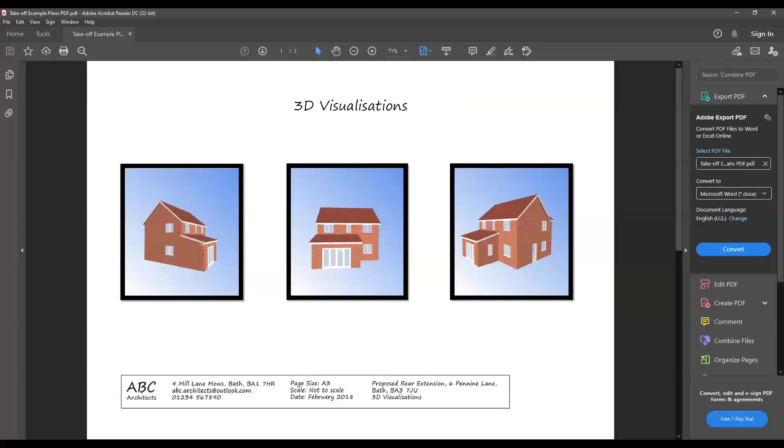We're going to be uploading this PDF, which I'm going to populate on screen. It's actually just this kind of extension off the back we're going to be doing, a little lean-to. Keep it nice and simple today. This will be our plan view.

The reason I'm using this plan is because on our website, it actually exists as part of our Take-off and Estimate Kit software skills training on our how-to video section on the support site. I'd encourage anybody looking to use this method to get their teeth into this software skills training course.

It's broken down over 4 modules. The first module is hosted on YouTube, so you can watch it as and when you need to. It also has that PDF attached, which you can download and use to practice on. It's also got shortcut keys and what they mean and how to use them.

I'm going to be using a combination of these keys and I'll try to explain them when I use them. These keys are very helpful when it comes to using the software as you go. It can be slightly unintuitive with the mouse gestures - it takes a little getting used to, but once you do, they become second nature, like anything as you learn.

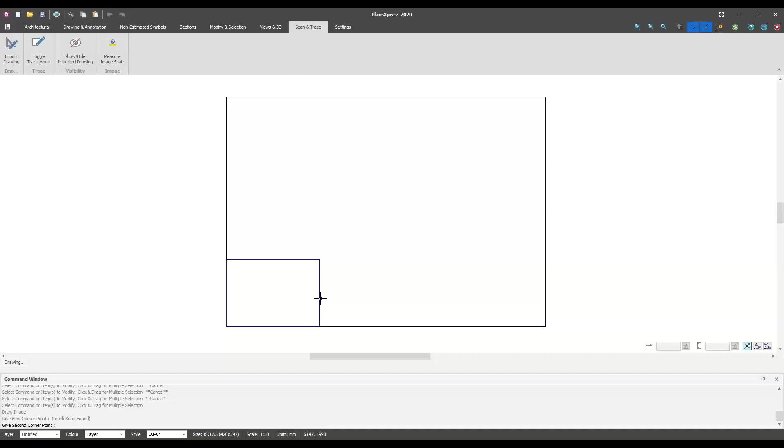When we click finish, it's simple now, just moving the mouse down to this bottom left hand corner. What the mouse will do is actually snap to that bottom left hand corner, it'll snap to that little point, it'll find the origin point. What I'm now doing is left mouse clicking, but taking my finger off the mouse and just moving the mouse up to that top right hand corner. So that's all I'm doing there, I'm just pasting it into there, but taking my hand off the button, just moving the mouse. Then I'm left mouse clicking once we get to this top right hand section, and that's pretty much the PDF in here.

Now that's actually using a template. I'm sure some of you are thinking, well, we don't always know the scale size of the plan. So what we've done is we've actually built in this measure image scale button.

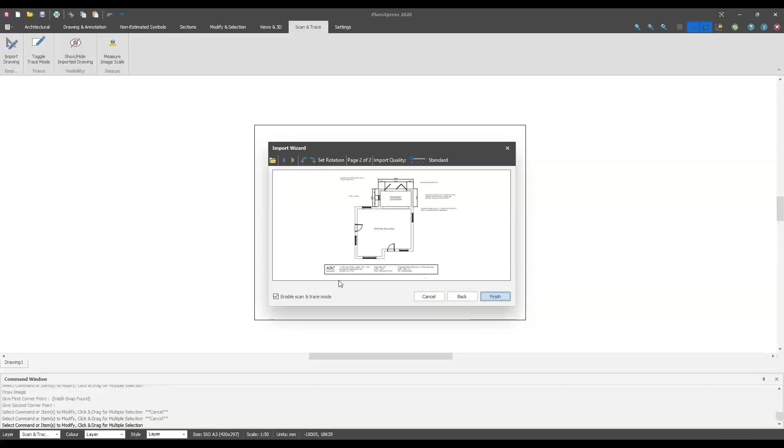Once we import the plan, what we can actually do is go find the one that I'm after, click open. So repeating what I've just done, go find the right one, plan page number 2, click finish. Now rather than pulling it all the way up there, say I don't really know what the scale is, all I have to do is paste it anywhere on here. And then using this tool here where it says measure image scale, we know the length of that wall, it's 4.8 meters in length, or even this door, this door is actually 3000 mil wide, or even if I was just measuring the cavities, say at 300 mil, we'll make a rough idea - it's probably going to be about 300 mil wide.

If I click on that measure image scale button, and then click on the PDF edge, just there, that's the line of the PDF, just there. And then what I can do is measure from that wall to that wall, and then punch in 4,800 and click OK. And what the software does is it actually rescales that for me.

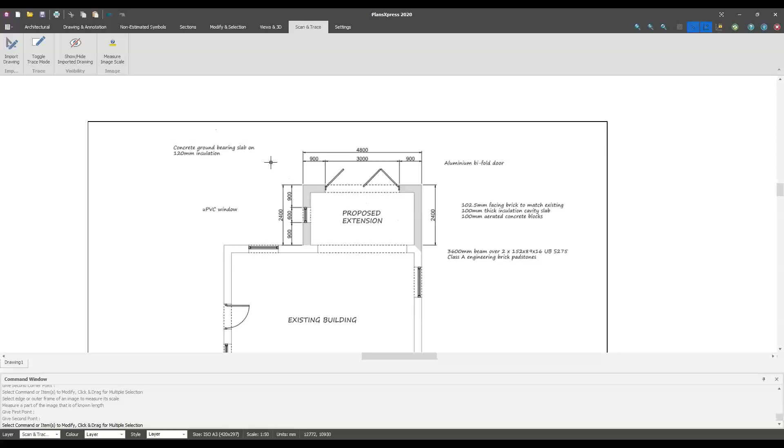So if you don't know the scale, you don't have this information on the plan, someone's just giving you a plan and it doesn't have too much information on there, as long as you know a known length, width, or height on the drawing, you can use that measure image scale button. You measure that area and it will resize and rescale the plan for you to the right size. So it's a little feature in there, quite useful. I see a lot of plans coming from our users, from our inquiries, and yeah, a lot of them do not have that much information on there.

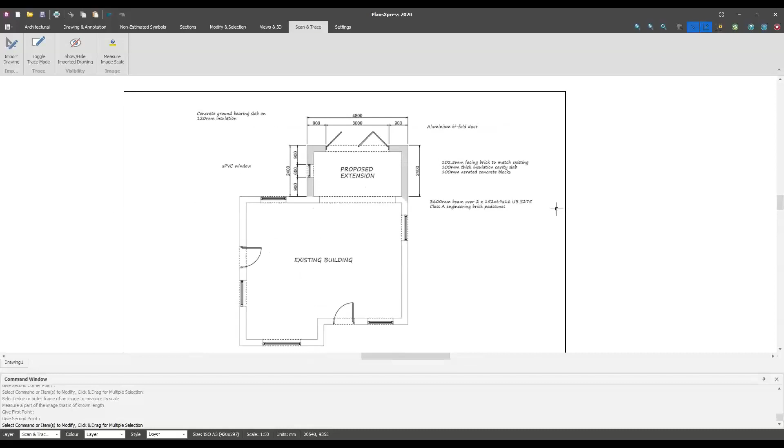So we've got a plan in. What I'm actually doing there is just rolling up, for those that have got a 3-button mouse, you'll have a little roller wheel on top. If I'm just rolling that, wherever I point my crosshairs on the mouse, if it was over here, it'll roll to that section, if I was pointing over here, it'll roll to that section. And what that's going to allow you to do is just get right into the drawing, it's a nice little navigation tool in there.

And what I'm doing there to actually manipulate and move the drawing round, I'm just pushing down on the roller wheel, and that will allow me to move the drawing around as well. For those that are maybe working PDFs, there's a grab feature in a PDF drawing or image. You can use that, or again, just rolling and grabbing. That will become second nature the more that you use the software.

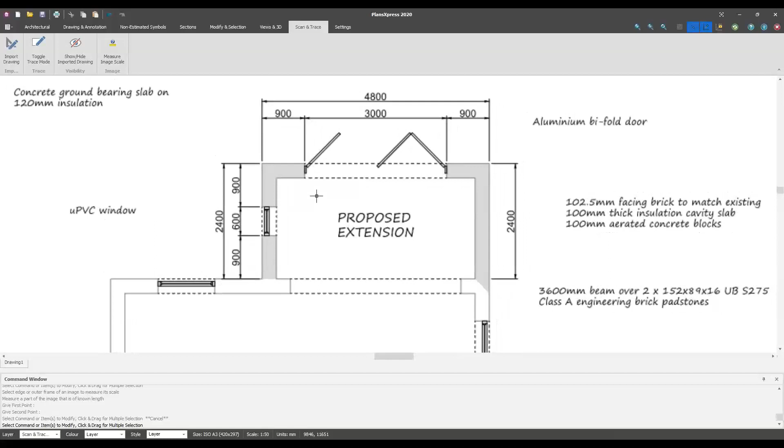Now, what I'm going to be doing here, I'm actually going to be tracing over this section, this proposed extension. We're actually going to replicate what's already here, because this being a PDF, there's just no information on here. It's just an image, but it does have some detail. So in order to actually draw this, what I'm first going to do is mark out the edge of this existing wall we're going to be building off just here. And I use what we call a construction line.

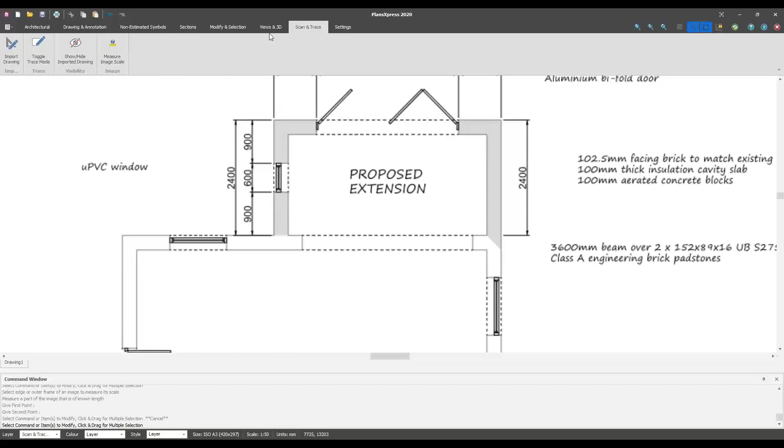Now, they can be accessed if you push down on the middle scroll wheel button. You'll get this little sub menu popping up, and you can access your construction lines there. Now, for preference, under settings, you can actually switch that mouse button around. I actually use the right click rather than the middle scroll wheel function. I just prefer the right click. That's just how I like using the mouse. So I've changed mine, so I have a right click function there instead of the middle scroll wheel function.

All right. So if I choose a construction line, I can choose a vertical one, and that is now a little floaty line that's floating around on my screen. I'm just going to line it up with the edge of that back wall. Again, the construction lines are just used as a reference point, and they will come in very, very handy. And it's all explained in the video, just how important they are.

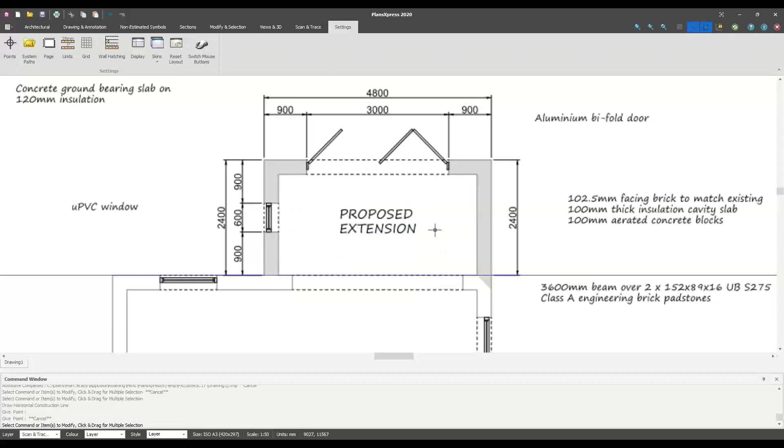Now, this first wall, I'm going to set another construction line, 2.4 or 2,400 mil from that construction line up to one there. So if I select another horizontal construction line, I'm just going to lay it on top of that one. It will snap to that construction line. And when it's on top of that one, if I press the R key on the keyboard, then using the up arrow key, I can actually punch in a distance. Because I've used the up arrow key, the direction of that construction line is going to move from south to north.

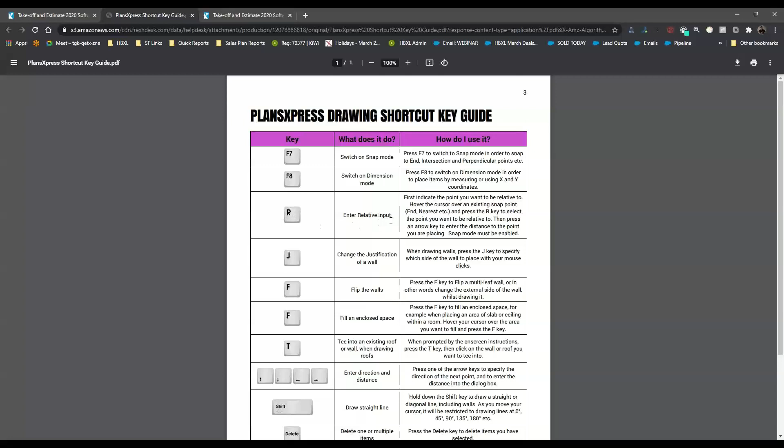So I'm going to put in 2,400, click enter on the keyboard, and that has now placed a construction line 2.4 meters from that one to that one. And as I said, this is all explained in our little hotkeys. That's the R key there. It actually stands for the relative input point. And that's your keyboard keys, up, down, left, right. That will allow you to put in a direction and also distance. So that's what I've employed using those little keys there.

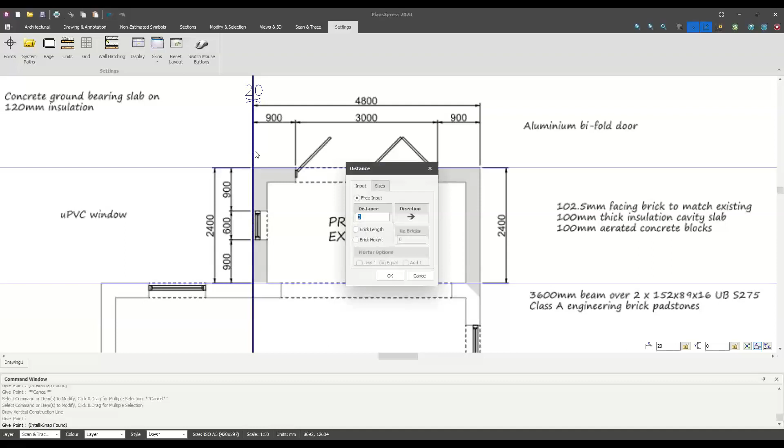Again, I'm going to use another construction line. This time it's going to be a vertical one. I'm just going to mark out the edge of that wall there. But I want to set another one, 4,800 mil from there. So again, I'm going to repeat what I did before. I'm going to lay that construction line on top of there. It will snap to that. I press the R key, but this time pressing the right arrow key on the keyboard, punching in 4,800 and clicking enter. That's now set a construction line 4.8 meters from there to there.

So when I now place my walls, they're going to be placed around the right dimensions based on this extension. And I'm ready to place my walls now on the extension here. Just while we do that, I'm going to bring up the 3D preview. Now, the 3D preview sits on the right hand side.

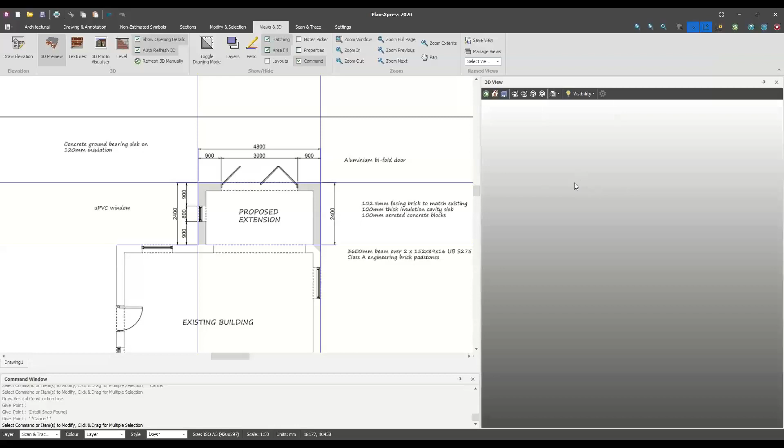You can have different kinds of color backgrounds if you want to. If you want to work with the white background, go for it. I like working with a black background or a grey background. It's again just down to preference really, or a dark grey one. The reason I want to leave it open, I want you guys to see it will create a 3D image of the walls once we place them.

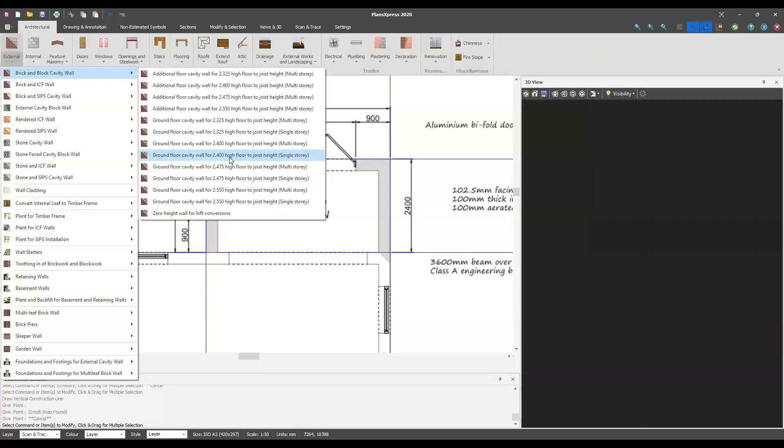I can change it anyway once I select it, but these again are just here so you can quickly choose the right height of the wall or something that was quite close to it. So what we're going to do is a ground floor cavity wall, 2.4 meters high, single story extension. So I'm going to select that template there. It just takes a couple of seconds to load.

For those that are familiar with Estimator Express, you'll find these little windows, these little boxes in Estimator Express. So this is now going to be the values that I'm going to be estimating the plan with. When we pass it into Estimator Express, it's going to pick up these dimensions and then estimate it based on these values. So we've got 2.4 meters high. As I said, you can change that. If you want it to be 2.5, 2.475 or 2.4, you can put whatever height of the wall you want in there.

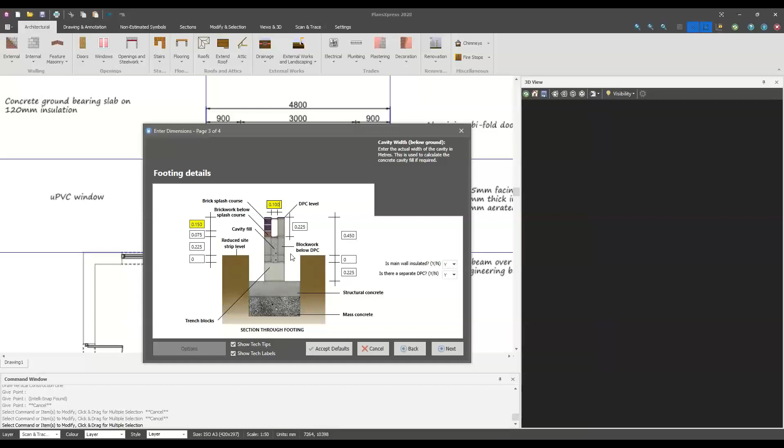All right. Leaf thicknesses are going to be 100 mil. The width of the trench is going to be 600 mil. The depth of the trench is going to be 900 mil. So again, all these values will be passed over into Estimator Express to be estimated on. The footing details, we can do whatever cavity widths you want to put in there. If you want to increase them to 140 mil, you can do. If you want to leave them at 100 mil, go for it. But any of these other values we can change.

And also when it does the estimating, it will also estimate the internal block wall. It will plaster it. It will also decorate it. It will also run a skirting board around the internal leaf, as well as prime and decorate that skirting board as well. All right, so that's everything that's going to be estimated when it goes into Estimator Express.

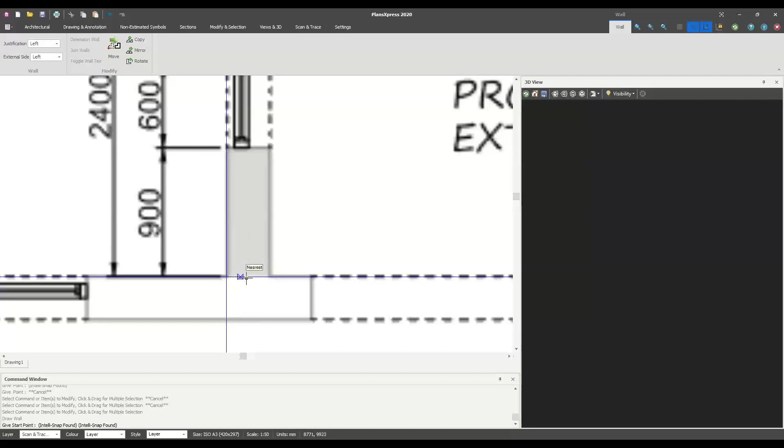When we click Finish, what I now do, I zoom in using the middle scroll wheel button, stick in my crosshairs. I can manipulate that around if I want to really get into the corner of that drawing. What you'll see there, it's actually snapping to the intersection point where these two construction lines meet. And that's why I laid the construction lines down, because it will snap to there. So all I have to do is left mouse click.

I can just stretch it to that point there. I can then stretch it across here, and then I can just pull it down to that wall there. And as you can see in there, that's our 3D now generated with the three walls that we've just placed on the plan. Quite easy, quite straightforward, once you get the hang of it. And as I said, all of this is done in the modules. I think Olivia actually goes as far as creating the existing building as well.

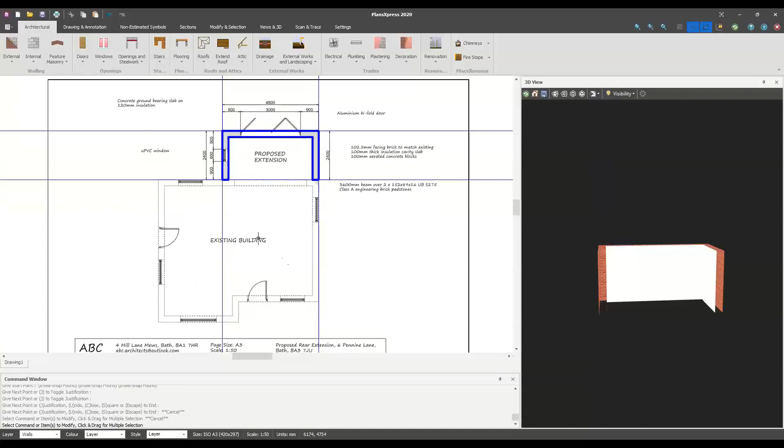So what she probably does on the video, you can actually then kind of create the existing part of the build. We're not going to do that today, but what I am going to do, I'm going to put in this back wall, because we've actually got an opening that we're going to form into this existing wall we're building off. So to put the existing wall in, you've got two options.

You can either just click on that button there and it will choose the wall, or if I right click, I can choose the last thing I did, my previous command. So if I choose that, it will copy whatever walls you've just placed there. And what I'm going to do here now, I'm going to place the wall from there, and I'm going to just attach it to that wall there. Okay, so that's the existing wall that we've just popped on there.

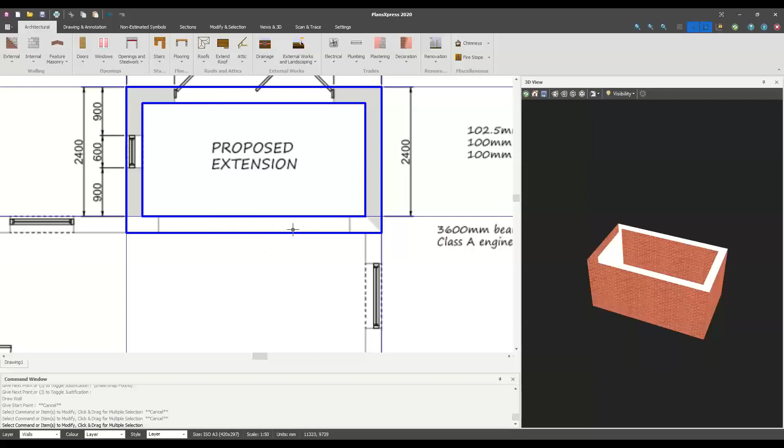Obviously the brick facing on that side is an existing wall we're building off. Now we don't want to price up this section because it's already there. It's all part of this long wall here. So what I'm going to do, I'm going to select it. Now I know it's selected, and the 3D does help me to say that it is selected. It goes that purple color in the background, so we know that we've selected it. Now if I right click on my menu, I now get these additional options in here.

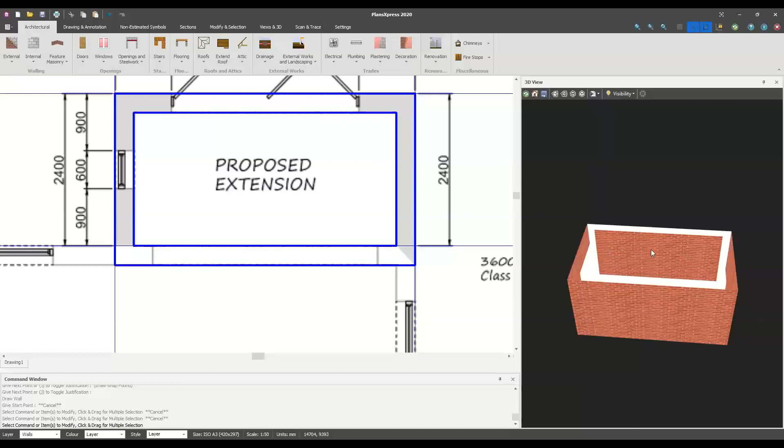I can set the wall to be non-estimated. So if I click on that, it will second guess me just to make sure I'm doing that correctly. So if I click yes, this back wall is now non-estimated. So if I fed this into EstimatorXpress now, it will ignore that wall. It's not going to price it up. It will only price up these three walls here. Because what I want to do, I want to form an opening into the existing wall, which will be estimated.

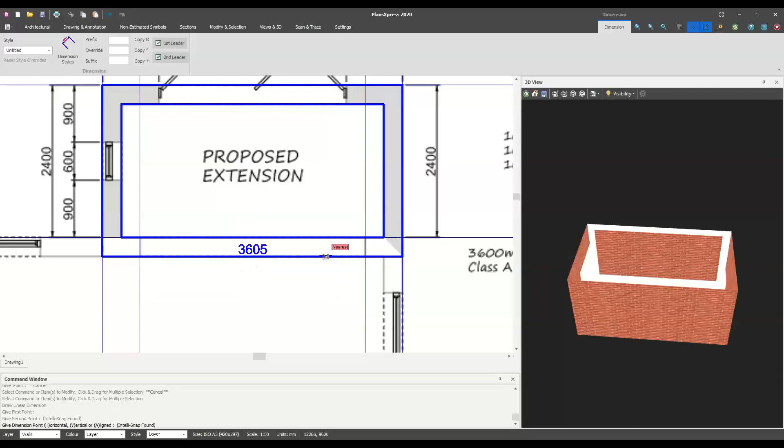So to form the opening, we don't really know the size of the opening. Now you can use, sometimes I show this, a construction line if you like. You can set a construction line from there to there. And then what you can also do in this right click menu is under the annotation, you can click on the linear dimension tool. And what I can then do is just click on that construction line, move it to that construction line, and that will tell me that that gap is about 3.6 or 3.605 meters wide.

Now, give or take a few mil, it's probably about 3.6. So I'm going to put the opening in there at 3.6 meters wide. So I'm going to go to the structural opening. I'm going to do a large opening size, and that's already got one in there at 3.6 meters. But if it was 4.2 or 4.1 or 2.5 or whatever the opening sizes are, just change the value in that section, and then that would draw the opening at the correct size. And we're also going to take away 2.1 meters high.

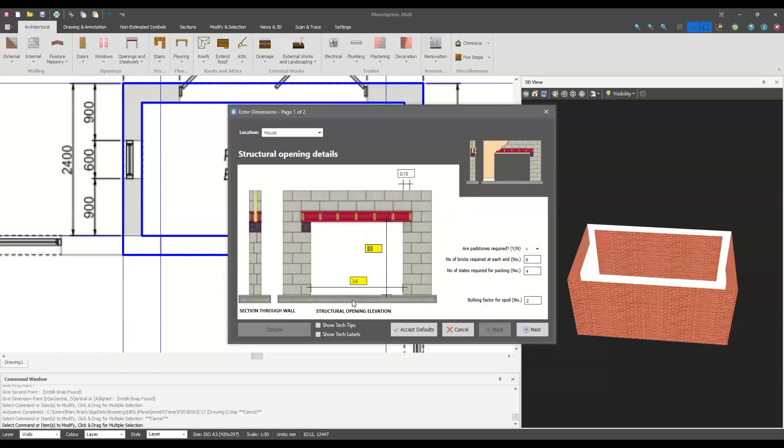When it goes into EstimatorXpress, it will also allow for the lintel, the steel that's going to go above it. So it's going to take away all the brick and block work from that section. And it's going to plaster around the opening as well for me. So that's the opening there now. So again, I'm just going to line it up, just pop it in there. And then you'll see in the 3D, it shows the opening.

With the 3D as well, you can spin this around. So if you want to get a different view on it, you can. You can manipulate that just with the mouse. Keep your finger down on the left mouse click. All right. What I'm also going to do is just highlight these two construction lines.

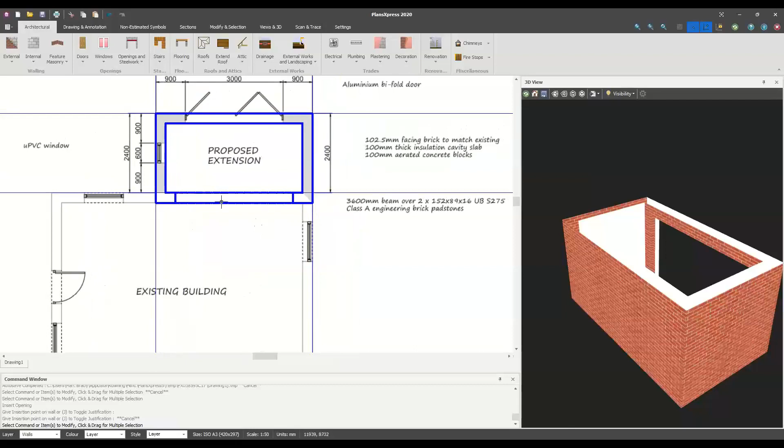You can do that by using a method called lassoing. So what I'm doing, I'm lassoing just there to select both of them, and then press delete on the keyboard and they'll disappear. All right. If you want to lasso the whole drawing, you can, but it's just something we call lassoing. All right.

What we've got in here now is we're going to put a floor down here. There's no floor at the moment, so I'm actually going to drop in a slab around this section, but I also want to put the slab into the opening section as well. So when I go to the flooring section, I'm going to go to the floor slab. It doesn't necessarily have to be a slab. You could be putting down a raft, a beam and block, or a timber floor. But we're going to be doing a slab.

I'm going to do it in an irregular shape because I want to get this little shape in here. What that allows me to do is when we select the slab, we can then estimate the slab up, all the values in there. We can put the depth, top and bottom reinforcement if there's any.

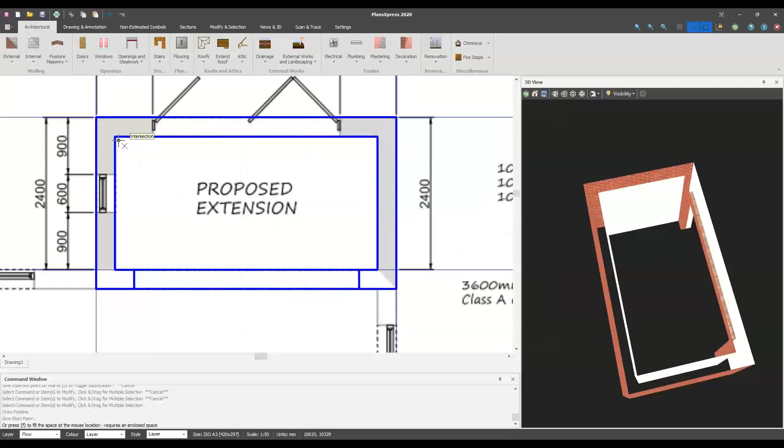And then what I can do is just go to the corner. Just make sure I'm in that corner, and that's where the middle scroll wheel button comes in handy. You can really get into those sections, scroll out, scroll into that one, scroll into that one. All I'm doing is following the contours of the area I want to slab. So I'm taking in this little opening section, and then we finish off in that little circle where we started. And that's us put the slab down. You can see there it's got that green section with the little opening covered as well.

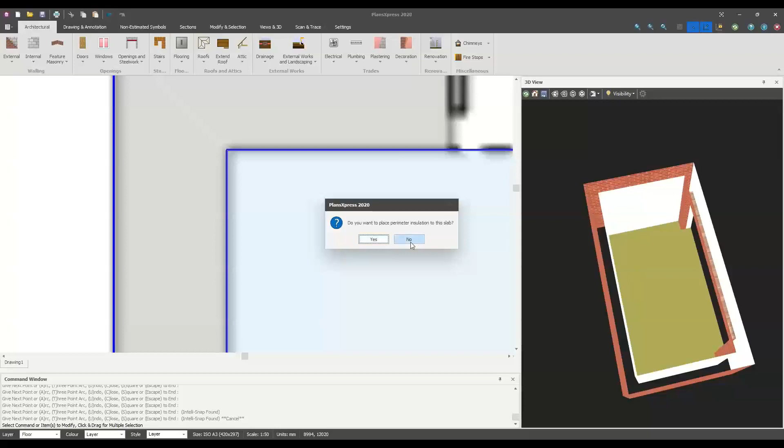Now it's asking me, do I want to place perimeter insulation? I'm not going to do it now, but if I clicked yes, I would do exactly the same thing I've just done by going around the edge, and that will then put perimeter insulation around the edge for me. All right.

Oh, yeah, one question. Your snap point, if it has been turned off, there's two ways of doing it. Where is it? Where is it? If I'm just placing, probably the best thing to do is press the F7 key on your keyboard if you are following what I'm doing. So for your snap, you press the F7 key, that should bring your snap function back on. All right. So I'll just answer that question. Let me know if that works.

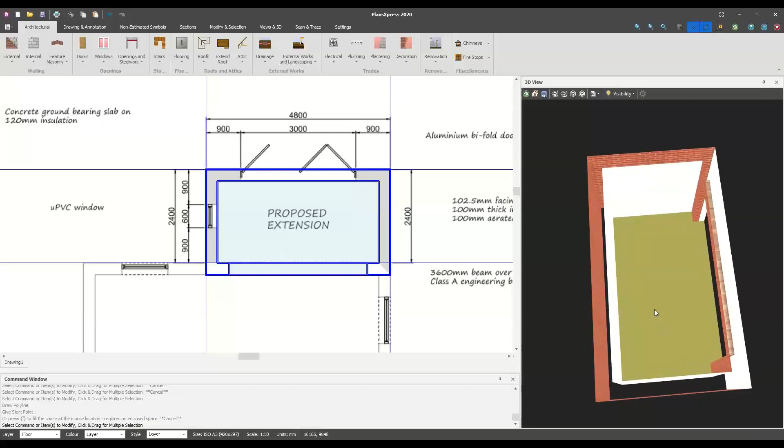So yeah, now we've got the slab down, and then we can start putting in some of the details here. Obviously, we've got a window this side, we've got a bifold that side. So let's put the bifold door in first. We know it's 3000mm across. So again, going to the door section. Drop that down, go to the doors.

You've got a choice of going through Crystal Direct. If anybody doesn't know, our software does actually link in with a windows and doors company called Crystal Direct. They are quite handy. They do actually offer a price within the software. So if I do Crystal Direct there, what I can do is go to location, go to a previous location. Let me just pop that in.

So Crystal Direct, they're a windows and doors manufacturer, windows, doors, roofing systems. If you were punching in your postcodes, you could actually see who they're supplying in that area. Just to give you an idea, they nationally supply B&Q for the windows and doors as well as TradePoint. But within that area, they're supplying Blanchford's, Build Base, XL Plumbing Supplies, Lawson's, Jubilee Building Supplies, Buttles, Grant and Stone. So they do supply a lot of windows and doors to the industry.

So if you want to put the Crystal window in there, you can go to the door section. Under the bifold doors, you can choose either a Crystal aluminium or plastic. If you don't want to use them, that's fine. Just use some of the default ones that we've got, and you can then put in, when it goes into Estimator Express, your own supplier cost. But I'm going to do a Crystal one just to show you.

I'm going to go to an aluminium door, and this brings up this little view. I can choose the size. So let's say it's 2990. We can choose the U value, 1.1 or 1.5. We can choose the color, and we can also choose how it's going to hinge. So that price there is how much you'll actually get the door for by going through Crystal Direct, through the software, rather than going through those suppliers.

So I'm just having a cup of tea a minute. Mute you so you don't hear me slopping.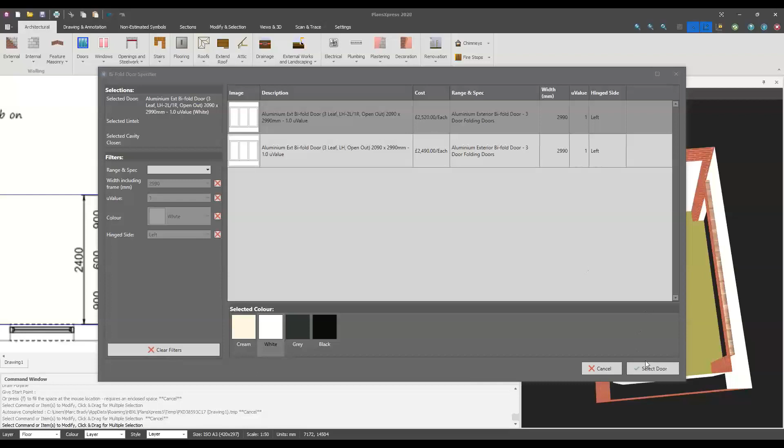So we've got £2,500 there. We can also pick the lintel, pick the cavity closer. Then all I then do is just line up that door there. So we'll pop it in there, and that's the door now gone into the extension. All right. And then what we can also do is put a window in there.

600. I think, does she have the? Can't remember. She's got it. It's got the aluminium bifolds. Yeah, she hasn't really got the height of the window, but you could. Yeah, it's just a plastic window.

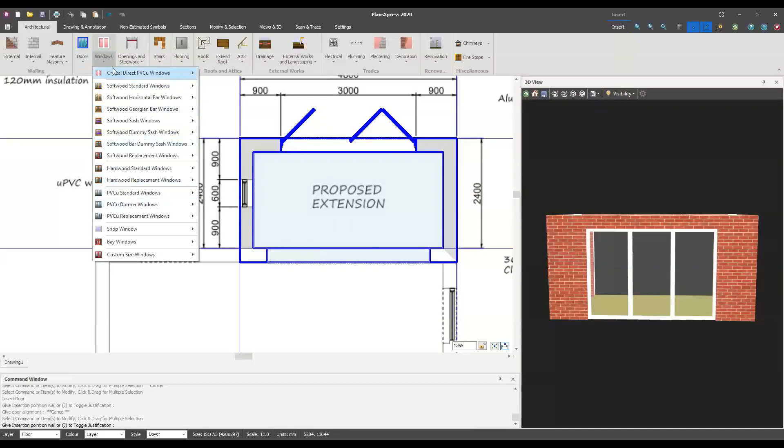Let's go to the window section. Again, I can go to Crystal. I can pick the width, and then we can also pick the height. Or rather than picking the height straight away, we can pick the style first. So if they are going to be center bars, that will then give me an idea of height. Or if it's not the bar windows you're after, a different style, style 11, that'll give you a 1038 in the height, 1.1 with a white one.

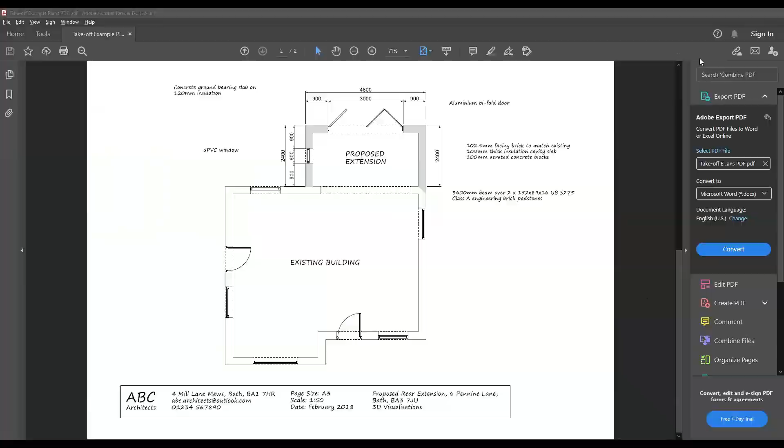So that's £150 for that window. And then just accept defaults, and then just pop that one in there. Oh, and then we should have that window on that side just there. All right, cool. Now we've got this wall here.

Now there's nothing on that wall, but that's not to say that you can't place anything there, especially if the client turns around and has a different idea, or they might want another bifold in there, or they might want a side door or another window. So what you can do is you can actually add to the drawing stuff that's not actually there.

So let's say we want to go to a patio. We'll keep with Crystal. I'm going to pop a patio in there. We'll do it at 1.6 across. Again, we'll do it as a white one, 595. Select lintel, cavity closer. Now, what we can then do is we want to put a patio door in it, and we want to find the exact midpoint.

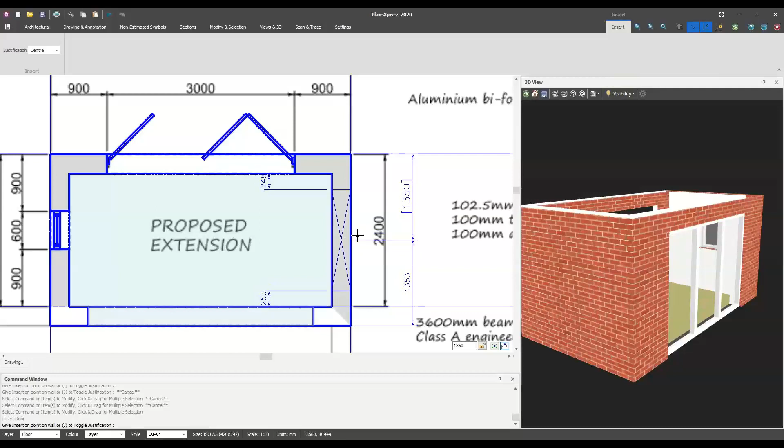If I press the M key on the keyboard, that snaps it to the midpoint, and we tell the software how it's going to open. And then we've got a little patio on the side as well now. So we've actually manipulated the original PDF with an opening that wasn't there. Again, if the client's after an additional opening there, then we can actually place it.

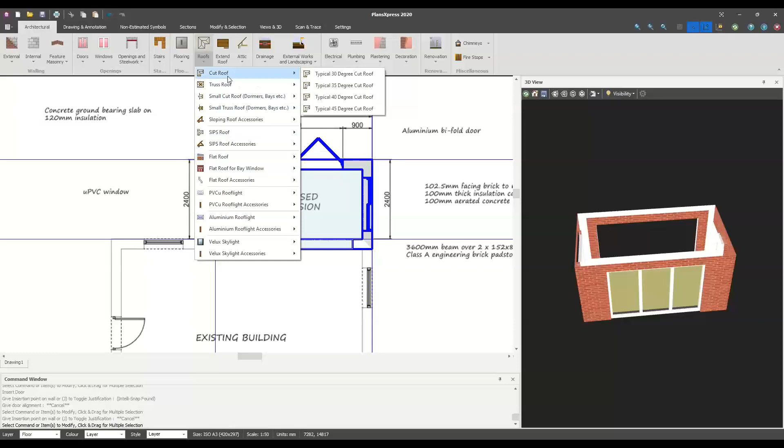And then what I'm also going to do here is just pop in a roof. Quite simply, we go to the roof section. You can place whatever type of roof, if it's cut or a truss roof, or even a flat roof. I think the original plan there was a lean-to, so we'll do a lean-to. And when you choose the lean-to, you can change the pitch. Let's do a 20-degree pitch, and this will estimate up all the timbers.

So we've got our soffits, joist centers, rafter centers. This is estimating up all the timbers, all the tiling that's going in there as well. Also all the guttering that's going to go into the roof. So everything's allowed for, all the roof finishes. So you can then choose the type of roof you want to put on there.

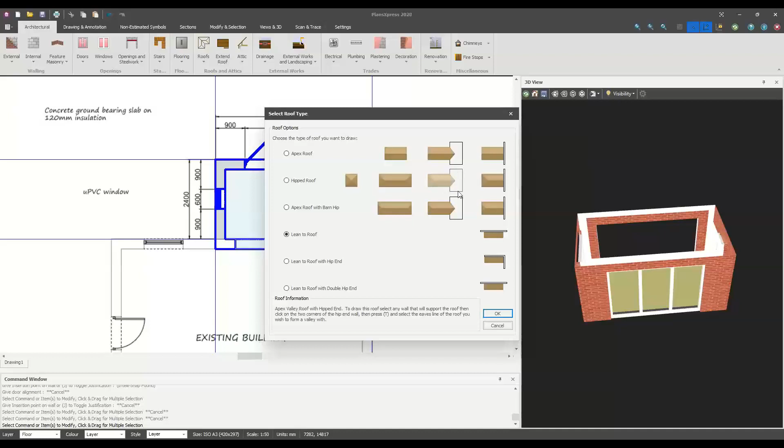If it's like a lean-to with a double hip, you can choose that one. Or if you're doing one with a hip end, we've got a corner that's coming off. Or if you've just got a lean-to that's going to go across. Or if you're doing a bigger project where you've got an apex roof. And this will also allow you to put roofs that are teed into other roof sections as well. But we're going to be doing the lean-to roof on here. So I'll click OK. So to place the roof, all we have to do is indicate a wall line that the roof's going to be on.

So I'm picking this front wall here, and then what I'm going to do is give the first corner where the roof's going to be. So I'll give that corner there. Now you'll notice that line floating around, I just need to give the length of the gable, which is going to be this side, and then we're going to give the length of the eaves to that corner. And then that drops the roof on automatically for you.

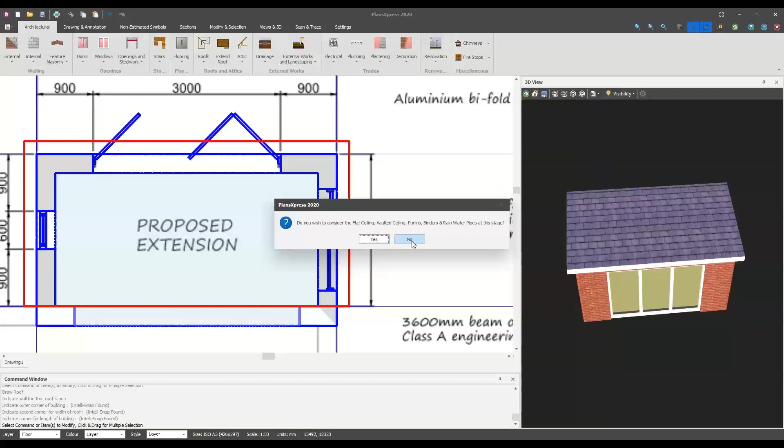If you do want to put in a vaulted ceiling or anything else in there, just click yes. And again, it takes you through how to put a vaulted ceiling into that section.

I think you can put one in just after anyway, the vaulted ceiling with a cut roof. So all we then have to do is estimate that up. That's what I'm going to do as part of this, I'm going to take that roof back off.

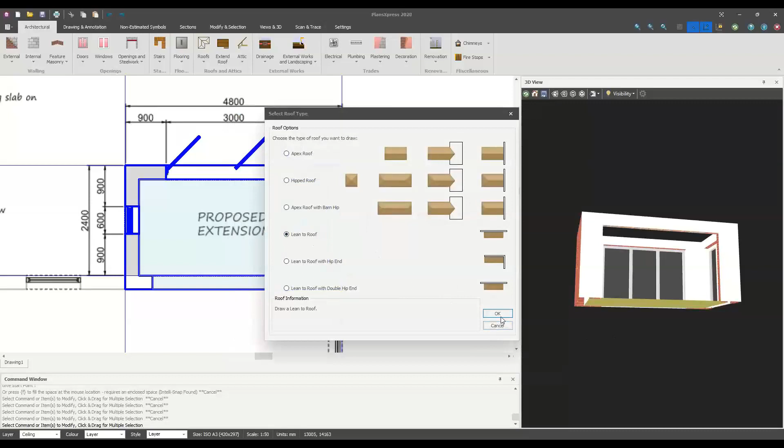Let me just do that again, to show everybody how we put the roof on. So again, change the pitch, price it up, choose the roof that you're after, select that front wall, select the first corner. The first length you give is the eaves, the gable, and then the second length is going to be the eaves there. Do you want to consider a flat ceiling, vaulted ceiling?

Yes, I do. Do you want to place a flat ceiling? No, I don't. Do you want to place a vaulted ceiling? Yes, I do. So that will allow me to finish on the vault. Select an eaves line, so we'll select this front eaves line there, and then give a start point, and then all we have to do is just go around the inside of the actual wall, finish off there.

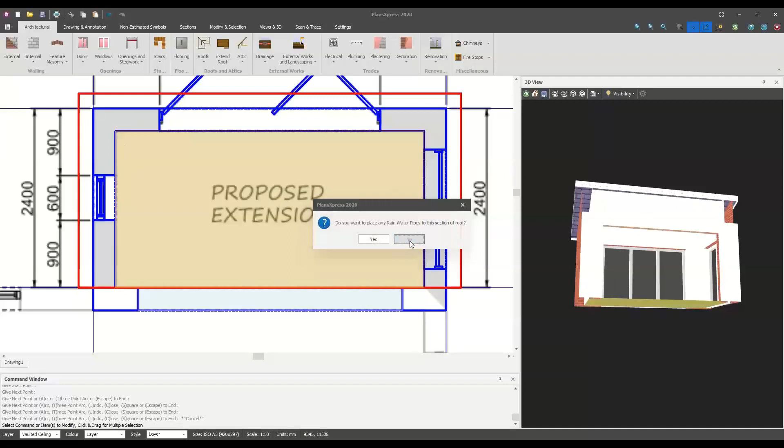Click no on that, I'm just going to click no on these other sections, I'm not going to bother placing those. But you can see now we've actually got the vaulted ceiling in there. Yeah, so it's now covering the tiles that we were just seeing a second ago. All right, so that's now going to be the vaulted ceiling, that section now.

Excellent. So yeah, this all really helps being able to visually see what the job's going to look like. Also gives the client an idea of what the job's going to look like. I mean, with our software, it's not necessarily that you have to just trace over stuff, you can create your own plans from scratch as well using PlansXpress.

But yeah, as you can see there, I mean, we can probably get through that with me explaining and everything, probably around about 40 minutes.

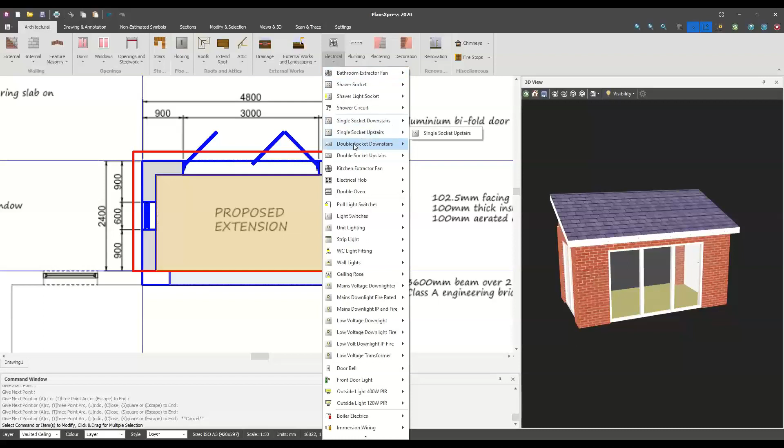What we can also do to this drawing as well is we can add any kind of electrical items. So if there are going to be sockets going in, if we want to put a double socket, we can just select that, and then we can just pop the symbol on there wherever the socket's going to go. Okay, so we've got one socket there.

Want to produce any other electrical items, we can do some outside lights, so we'll do some 400 watt lights here. Again, I can be a little bit more accurate on this, but I was finding the midpoint just there, so just snap to that.

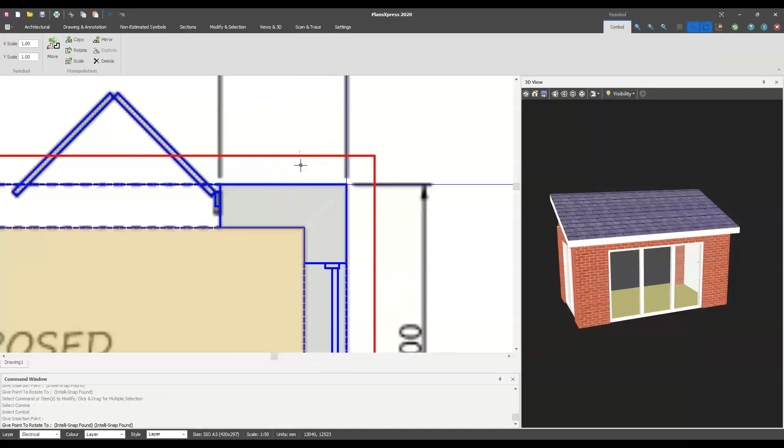Okay, so we can do the wall lights. They don't appear on the 3D, unfortunately. I think it is going to be an update that's coming at some point soon, where you'll actually have the external wall lights just there once you place them. At the moment, the only thing you can do if you want to show them in the 3D is actually use a non-estimated symbol.

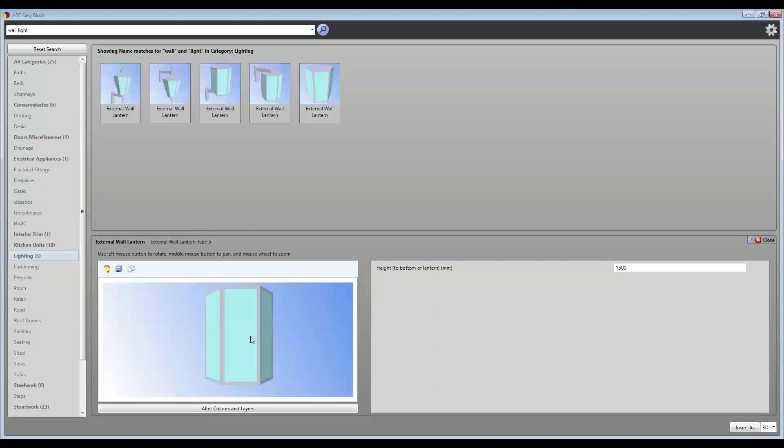And what we can do is we can actually go into the 3D architectural symbols, and I can pop in there wall lights. Hopefully that will find it. Lighting for external wall lantern. Let's select that one. You can manipulate the colors and stuff on here as well.

Well, if you want to show the effect on the plan, I think we can place it just there. Yeah, might have to make it a little bit bigger. We can select that one again, we can place one just there. So if you do want to show it on plan, you can do. You can manipulate the size of them as well. They're not very big, are they?

You can also put in some of the plumbing items as well. If you want to do a radiator, we can do a single panel radiator in there.

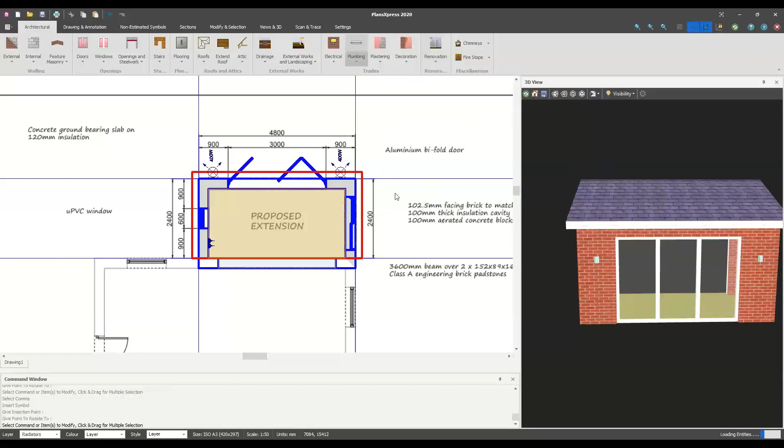And then we can choose a radiator. We can also put a radiator in there as well.

So you can then start building up the plan using the kind of electrical symbols, plumbing symbols, or if you're actually going a little bit further out here and doing a little patio for them, then maybe the patio is going up to this line here.

So I can do a little construction line. We'll put the patio to there. Again, I can be a little bit more accurate with that.

But we can go to the external works, go to the paving, and then we can lay a paving down off the back of this extension here. Go to that line, pull it to that one. So use your construction lines, and then we just finish there. And that's going to put the patio in there as well for you.

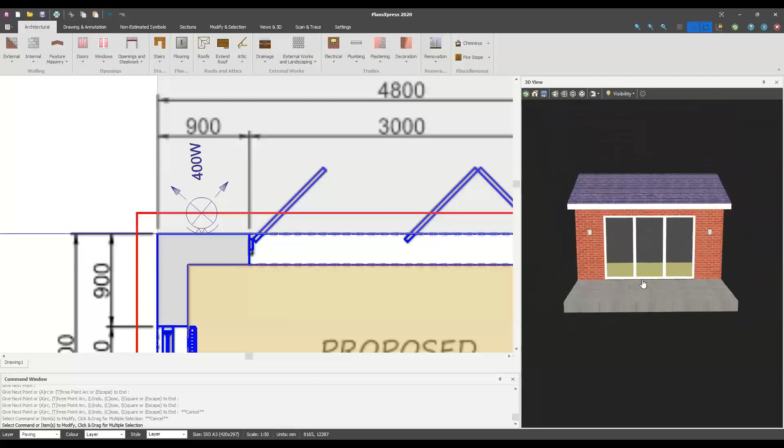Okay. So if there was a patio in the original drawing they want you to do, you can do that as well.

So let's get this section estimated. So all you have to do then is just save as, call it whatever you like, drawing 1, 2, or put the customer's details in there, just so you know who it is. I'm just going to overwrite the one that I've already got.

So let's turn our attention now to EstimatorXpress. We're going to have to pull that estimate in here. Again, for those that haven't really seen EstimatorXpress, this is our own standalone estimating package. You can just do estimates in here. You don't necessarily need PlansXpress, but certainly on jobs that you want to trace over that have a bit more to them, or you just prefer being able to visually represent the actual job from within here.

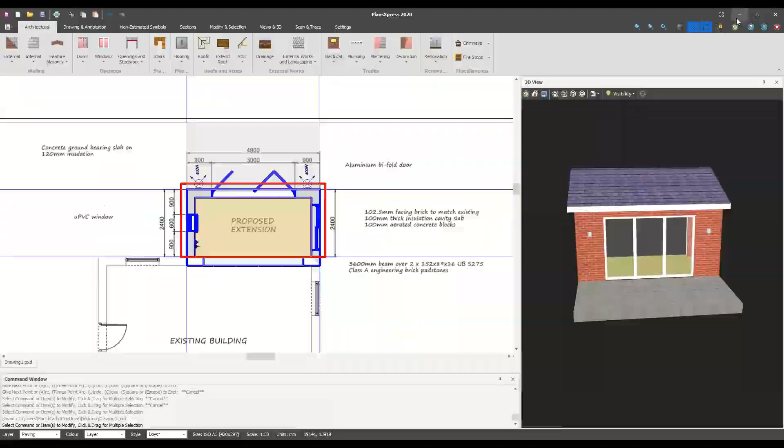So the way that EstimatorXpress works, very briefly, it bases the estimate on a price book, which breaks down into materials, labor, plant. If I just click on the material section, within here, you've actually got, out the box, these kind of prices here, which are called the HBXL Price Tracker Plus prices.

These are the default prices you'll find in the software. These are actually worked out based on a national average. We track online with different builders merchants, so we track whether or not prices are going up or down, and then we work out what the average is accordingly within the software.

But you can edit those prices if you like. I can drop in a 15% adjustment to that average if I like, and bring the prices down to whatever you want them to. So you can change these prices.

Same for the labour rates; they can all be manipulated. The brickies, for example, our software gives a guide price of around about £25 an hour. But different builders in different areas, you can again overwrite that price. If you want to increase or decrease it, you can do so just by clicking within there, or you can do it en masse.

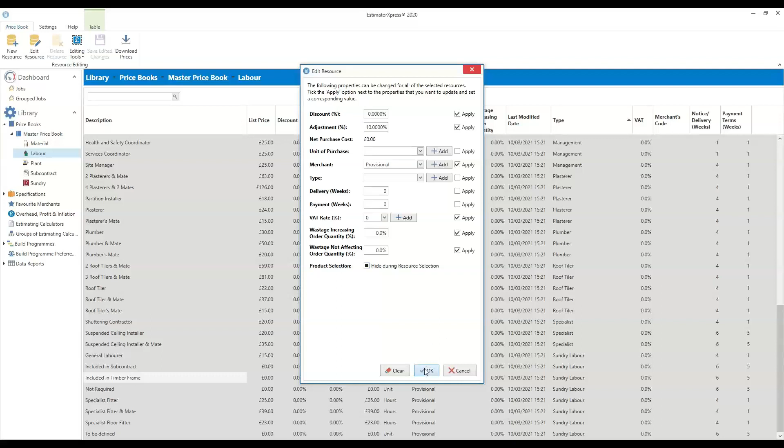If you select all your labour prices, you feel like HBXL prices are a little bit shy compared to your own, you might want to increase them by 5, 10%. And then what that does is change all the prices by 10%. So a nice quick way of changing those.

Also, when we do the estimating, we want to make sure that we're reflecting our own profit margin. So you can change this section here. You can put your own overhead percentage and then your own profit markup applied. Again, these can all be changed and customized to your own business practices.

What you can also do is put an inflation rate onto the job. So if the client wanted us to start this job, where are we, March, getting through this year quickly, April, May, June, say July time, what we can do is factor in maybe 4 or 5% just to protect us against any future inflation of materials and labour.

Once we start building, we've already allowed for a buffer for material increases, which means the client gets that price pretty much fixed today, even though we're building later in the year. This gives you an edge over competitors who aren't offering that. But you can set that inflation rate to whatever you like.

So let's go back to the dashboards. We'll create the job using that button there. And what we're now doing is ignoring the EstimatorXpress method of estimating - we're actually pulling the job in from PlansXpress.

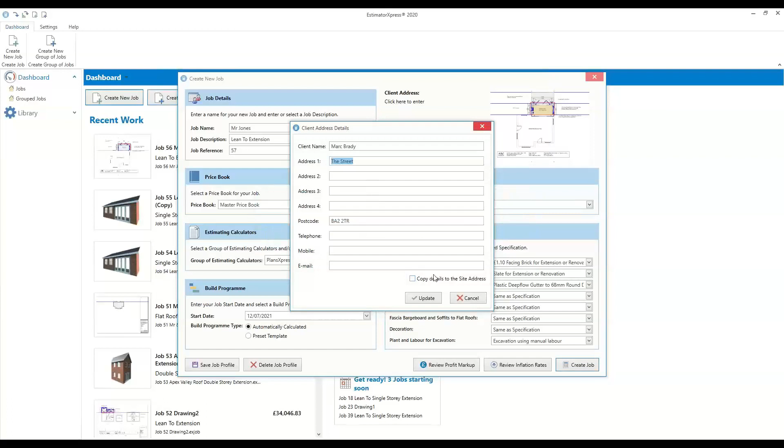And then when we're happy, put the client's details in here as well. If you've done the job for them before, putting in their name will recognise that, and it does store their details in there. Then you apply that and it all gets mapped onto the quote. It's a case of then just clicking that button where it says create job, and it's going to pull that in.

Good - just going through a couple of these questions. How do we do the brickwork to the gable? It does it automatically - when you place the roof, it will add the brick gable, and when it goes into EstimatorXpress, it will calculate the brick gables for you automatically. So that's all taken care of.

So as you can see there, it doesn't take too long. The price that's coming in there is 17,354.

So that's the 17,354, 5206.40, and then 22,561. That obviously includes your profit and overhead, excluding VAT. Materials are taking up about 3.5. Labour is about 4.2. Plant 658. We obviously don't have any subcontract prices at this stage.

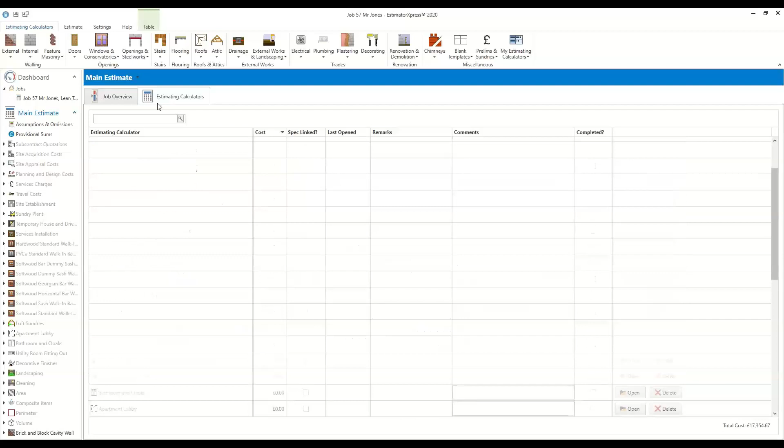So what I'm going to do, I'm going to click on that button there where it says estimating calculators. I'm actually going to get rid of some of these blank ones it gives me anyway. I can do that by going into the estimate and then delete the unused, and that will just leave me with the ones that we have priced up.

So on this job here, the only thing we really estimated is the shell, the floor, the roof, a couple of windows and doors, as well as some of the lighting and some internal electrics. So that's where it's picking up the cost of the brick and block walls, 5,696, roof 3,956, the door 3,187, the opening is about 1.5, the patio is about 1,200 quid, the slab about 621, the paving 556, and then the Crystal Direct window, external lights, electrical sockets, and also the radiator. So all it's done is pull those items into the estimate.

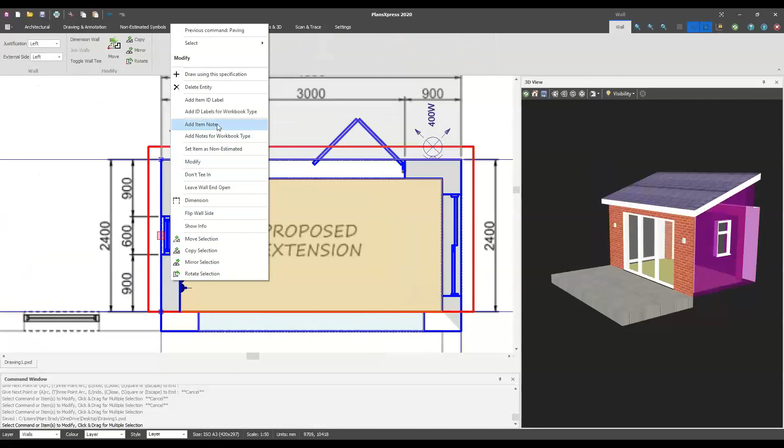Just to give you an idea, if I go into the external wall section, now looking at these walls we've placed. So it now gives me the 3 walls here with their lengths. So that wall number 1, the one at 2703, if I go in and add a note, by right clicking there, add item label. So that is now relating to that wall there. All right. So we've got the openings in there.

Also, these are all the other values that are going into it, as well as the calculator resources we've put in there. So we can filter that by quantities. So just down here, what the spec's actually doing to the estimate is working out what material you're using across the project, or particularly these walls here. So the bricks above the DPC. Do you remember we said we were going to use a £1.10 brick? That's telling us that we're going to need, including wastage, 958 bricks.

Because what the software is doing is applying this calculation, £66 a square metre for that element, because the software is being told how many bricks you're going to use over every square metre. So if our job's only about a 15 square metre job, it's then going to, including the 5% wastage, tell you how many bricks you're going to need and what cost, based on the fact that they're £1.10 each. All right. So that's where it's getting that £66 a square metre from.

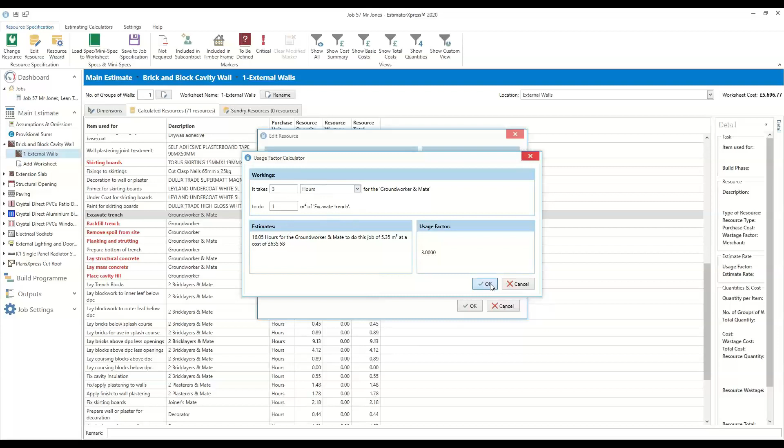But every single thing in the software has got a rate. Even excavating that trench, we did tell the software that we're not going to use any plant for the excavation. So that's not required. What it has done, though, is added additional time to the groundworker and mate, who we've got 3 hours to do 1 cubic metre of excavating a trench. So it's going to take those guys just over 16 hours to dig out 5.35 cubic metres at that rate. And they've got their own cost, so that's why it's working out that price.

But everything that's going into the wall, so all your concrete, your blocks, your bricks, your cavity insulation, your brick ties, the cement, the building sands, down to your plastering, your finishes on the wall, even down to your skirting boards you're going to attach, and how you're going to attach that as well, and even down to the skip, the wear and tear on the shovels, etc., to allow for that as well. So that's just the walls.

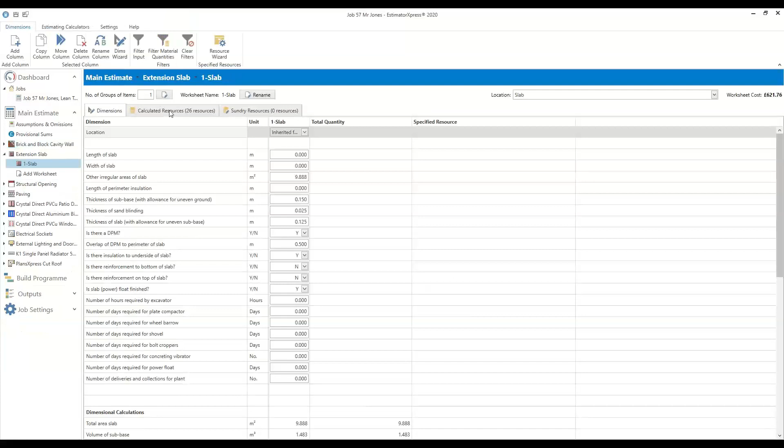If you're going to the extension, the slab, you can have a look at the slab, and again, by going into the slab itself, have a look at the resources. That's now looking at all the resources that are going in there.

Okay, but that's why it's arrived at that price, because we've set the software up to allow certain materials to be used across the job, and they've all got a rate. You can change the materials quite easily. You can change the spec in the library to have its own default prices or materials you want to use.

But if you click on the wall section, go to resources, you can use what we call the resource wizard, a little button that sits on your toolbar. If you click on that, you can skip along to any of these sections, click on any of these sections, and on this right-hand side it will allow you to change it. So we can change it back from being a £1.10 brick, and that will open up my drop-down list of all my materials.

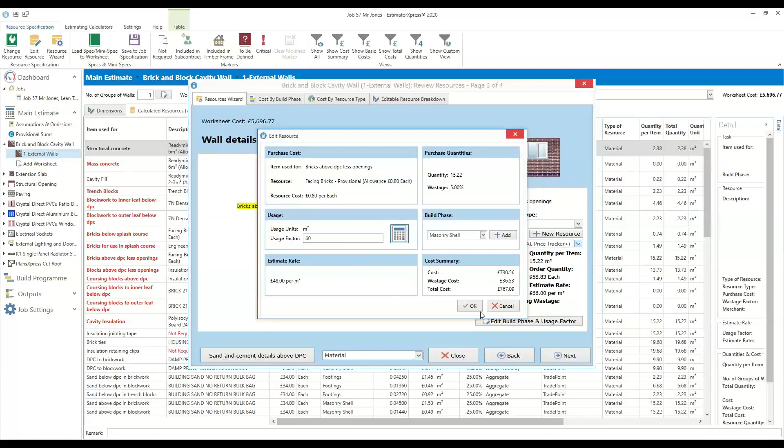I can change it back to an 80p brick, and then our estimated rate is going to go down to £48 a square metre, because the brick cost is only 80p. We're using the same amount of bricks, but we're just not spending as much money on them. So that's why it's working out the price that it is.

Same for the skirting boards. If you want to use a slightly different skirt, then you can. If the skirt you want to use isn't in there, you can just click on New Resource and put your brand new skirting board in within the estimate itself. You can add materials as you go. So the software is quite flexible to be able to change what's going to be used on the project.

Also, within the estimate, you can start putting in any other calculations. If you don't want to do them on the plan but want to pop them in here, you can put in different electrical items, different plumbing items. You can also put in your preliminaries. So establishing the site can be added. COVID, that's a big thing at the moment, so we can cover ourselves for all our COVID costs.

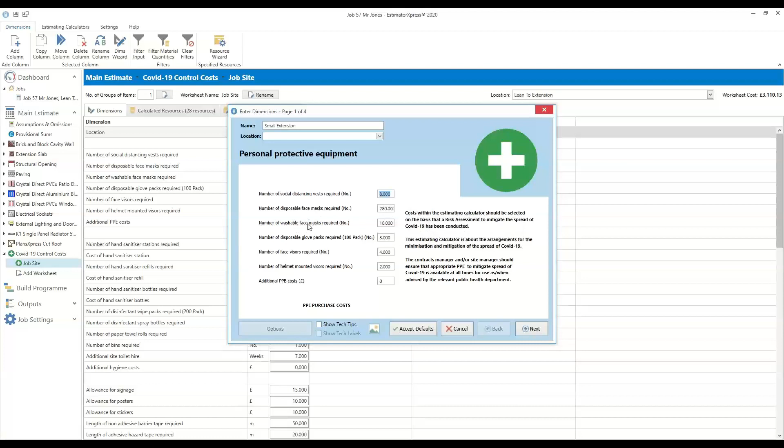So if we add a small extension COVID control, that gives us as a default 8 social distancing vests, 280 disposable face masks, washable face masks, face visors, helmets, hand sanitizer stations, hand sanitizer refills, how many bottles we're going to need, paper towels, number of new bins, any additional site toilet, and also signage, spray cans you might need to spray onto parts of the site, and any additional site supervision time you can pop in there as well.

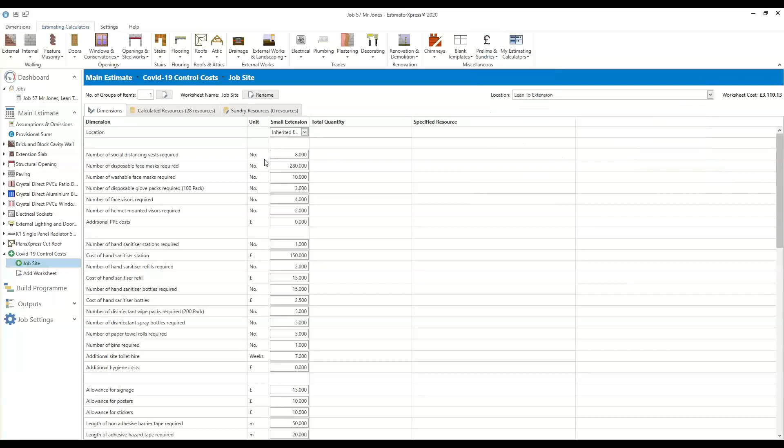So just pushing in that, that's coming up at just over £3,000 for those items. And if you want to do a site establishment, you can establish a small extension site. Then we can go in here and that'll give us a site cabin, site toilet. If you don't need the cabin, just zero it out. Possibly site clearance, skip permits, your overall insurance costs, site security, health and safety costs, they can all be allowed for in there.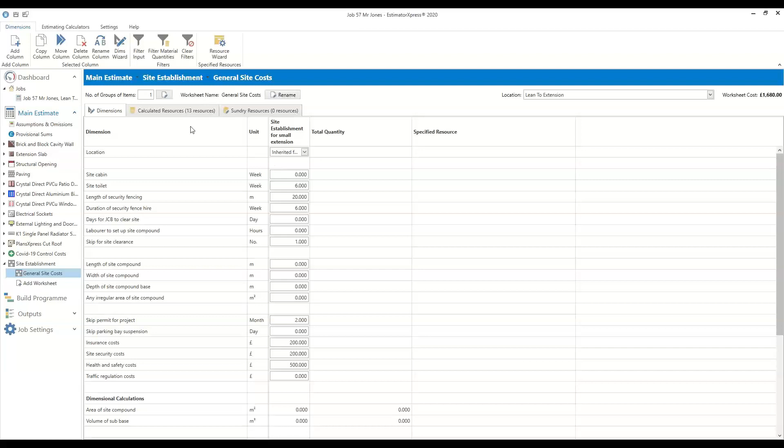So the more you start adding to the estimate, especially all the peripheral pieces of information, they get added and your overall job cost starts increasing. The software also comes with a build program, which you can generate, and that's based on the hours going into the project, based on your labour rates. So the way it works out how many hours are going into the job, that will then work out how long the job is typically going to take. All right.

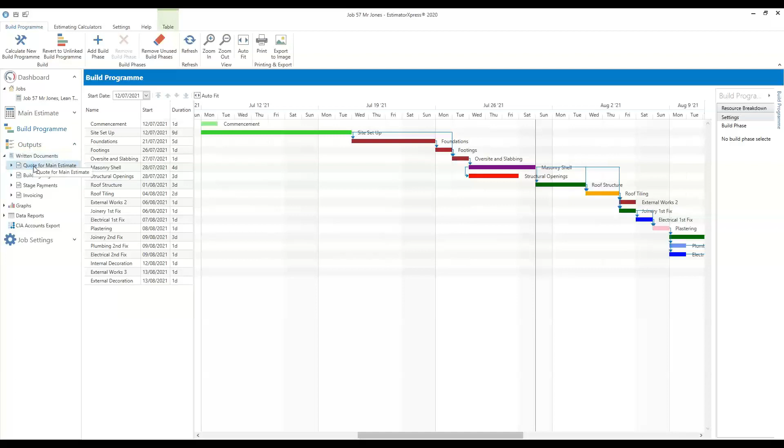And then when you get to the quotation, you can click on the quote for the estimate once you're quite happy and it's all been completed. Give it a second or two to load.

So that's now the quote there. You can upload your logo. That's done on the right hand side here. Just go browse for it, include it. That's now picking up the client's details onto the quotes, gives them an overall letter. The letter can be modified and changed on the right hand side here. You can overwrite the wording, put however you want to present that.

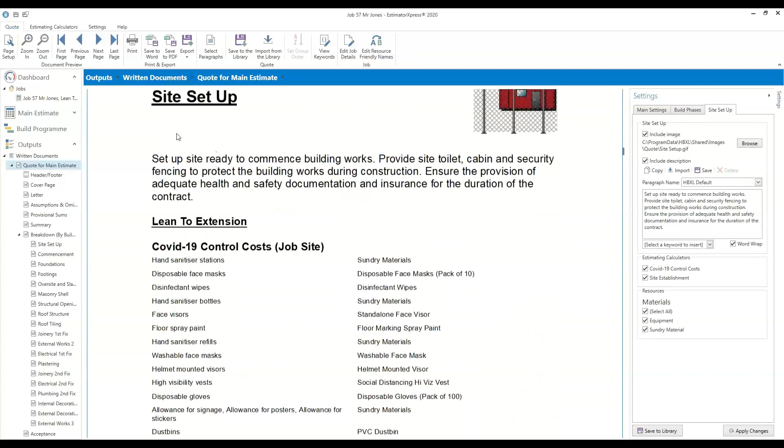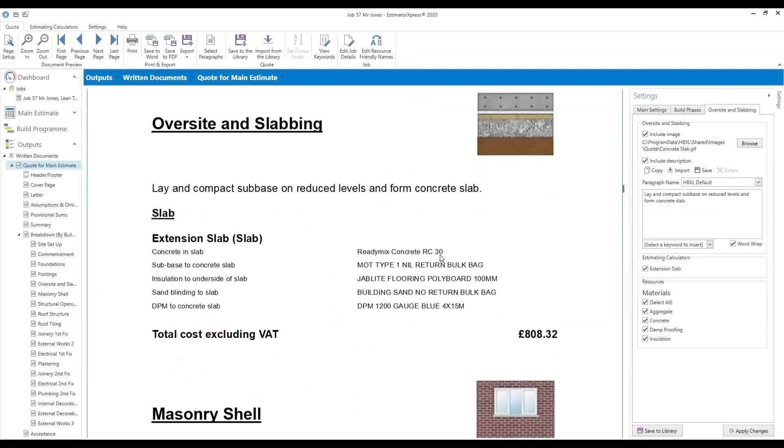It does give you a quick summary breakdown with the price down here now with the VAT included, and then it starts going through the build phases, with the price on there for the total cost of the build phase, description of the build phase itself, but it does then start listing some of the key resources the client has maybe requested or specified on the project. So when they get handed this document, they know exactly what they're paying for, and the things that they've specified are included in the quote itself.

Now, if it is more of a ballpark number that the client's after, what you can do is take away your resources from the quote, so we can hide those at this stage. And if you don't want the picture representations, we can take those away as well. So all they get is a document with the build phases listed, so you can change that to how you want it really. You don't even have to show the descriptions if you don't want to. If it's a very ballpark number that they're after, it will give them a breakdown there.

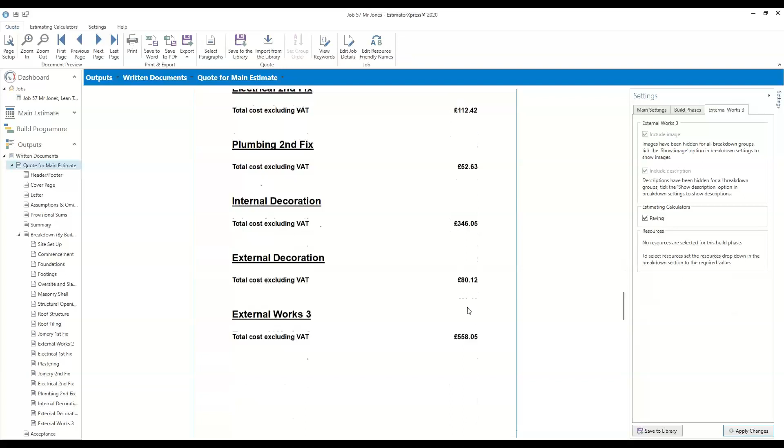So you can show the quote stripped out, or as much detail in there as you like, and then you can change that. Down here you've got an acceptance of the estimate. They get a copy, you get a copy, it's all signed off, and then you can leave them with your T's and C's at the end of the quote as well. Just copy and paste in there, and then just save it.

So that's the quotes, and then you can start getting into your cost data, and that can be generated using any of these reports here. If you want to have a look at your sales price, including overhead and profit report, we can open that. So that's now looking at a breakdown of the total profit, total overhead, and then obviously your total cost, including profit and overhead. You can look at cash flow reports, cost summary reports. You can look at labor reports, material reports.

A good one is the materials order schedule, because you can then generate that as a document, and that will tell you when you need to order your materials by, based on the build phases and how long the material is likely to take to be delivered. This is actually quite a big report with all your values on the right hand side, and costs and wastage allowances, etc., and a description.

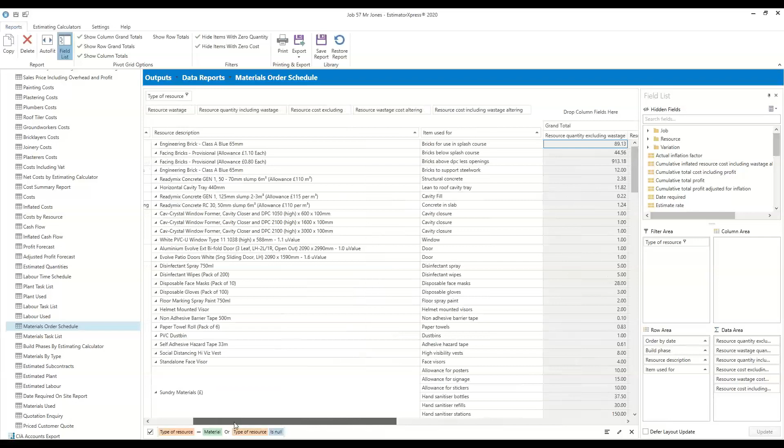And these can all be exported as an Excel file or a CSV file if you want to dump the data into another bit of software, maybe your own accounting software, etc. You can take these values into that. And it's the same for the quote as well. The quote can be saved either as a Word document or as a PDF.

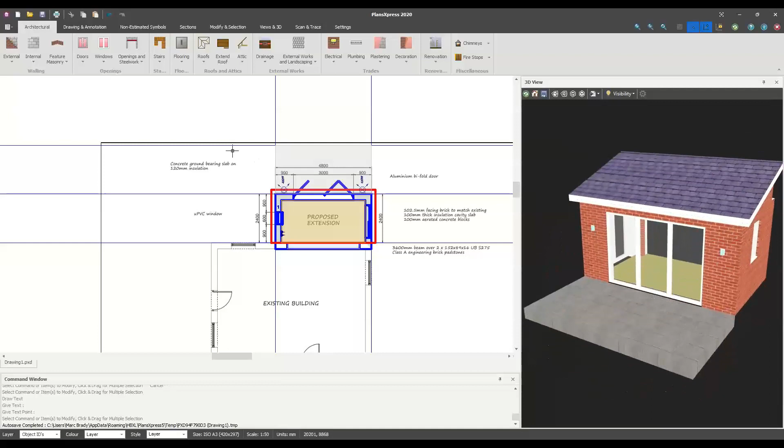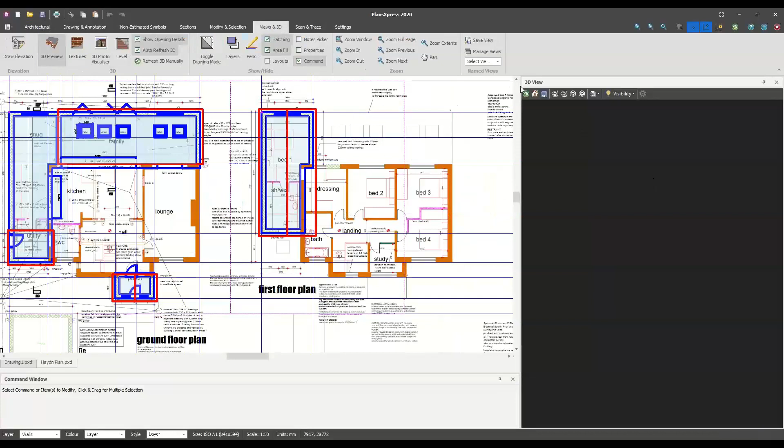So again, just applying that same principle, marking it all out with my construction lines, placing the walls where I want to place them. This one I had a lean-to at the front and a double-story wraparound. We also had a porch at this side, a little flat roof section at the back, and then you can see what the job's actually going to look like in a 3D environment.

So yeah, obviously those are kind of extensions we're doing. Just to give you an idea, this was a set of plans for a new build that were sent across. Did this for a builder just to show what can be done. So again, just click on the PDF there, it will show the PDF.

So this was actually 3 dwellings being separated by a wall there. So we've got the property here, property there, and we've also got this other property facing in a different direction, which is actually a slightly different configuration. And there were obviously a couple of floors to that. So again, all we had to do was upload the PDF. As you can see there, this one's actually in a slightly different vertical view.

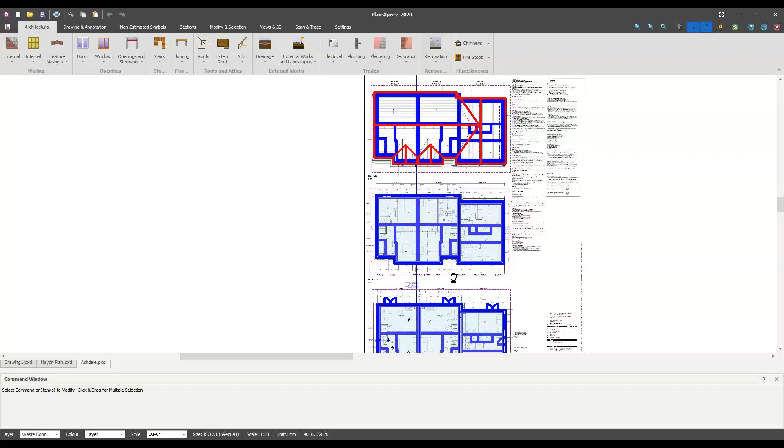And yeah, doing the first floor, copied the first floor over to do a second floor, and then we copied that floor over to do the roof section, and then that roof there was teeing into this roof here. So again, click on the 3D preview. It'll probably take a couple of seconds, and once you learn the principle of the software, it doesn't really matter the scale and scope of the plan you've got. You can do them as quickly as an extension would take.

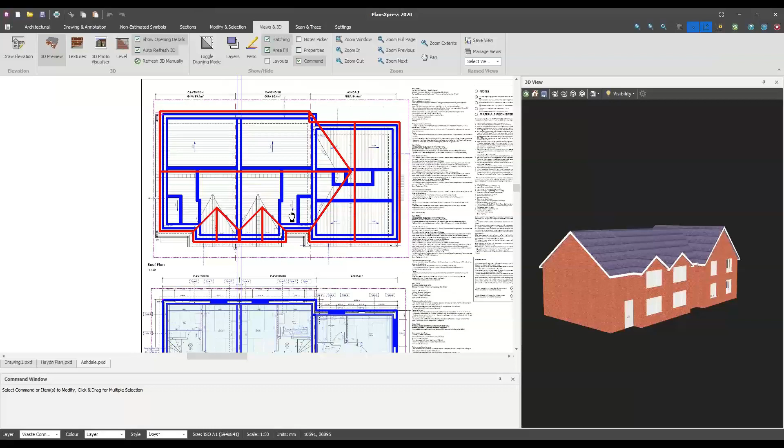And this is a new build drawing here that we traced over. Yeah, it's just about practice really. As I said, Olivia does take you through the principles on here of how to get going. Follow that, and by the end of module number 4 you'll be running through these types of plans, or nice simple extension plans, or even the loft conversion jobs as well. And all it is is tracing over an existing plan and then feeding it into EstimatorXpress, where it'll then price it up.

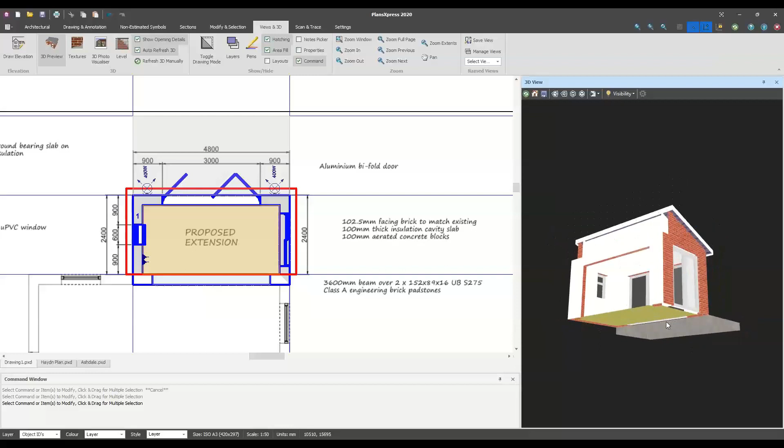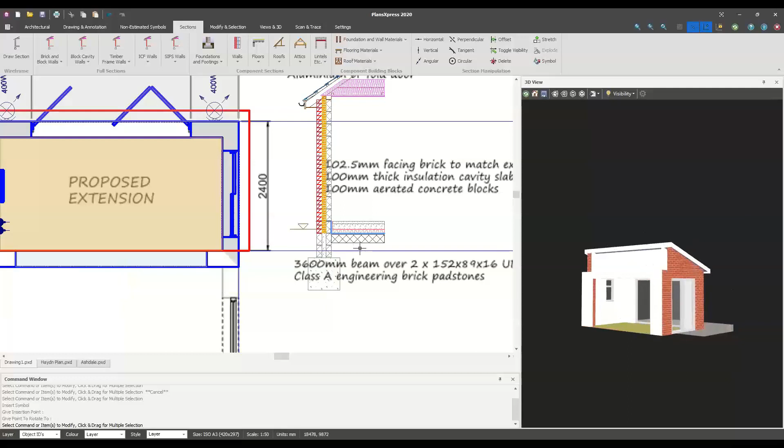You can. I'm not sure if it's in the takeoff version, but you can set out sections onto the plan. I'll have to check if it's on there. But you can put sections onto the plan if you want to. I can't remember if it's part of the takeoff edition. I think it might be part of the plus or the premium that will have the sections allowed, so you can show them on the plan, if that's what you're talking about. It won't be in the 3D, unfortunately. It will just be on the plan itself as a section. Okay.